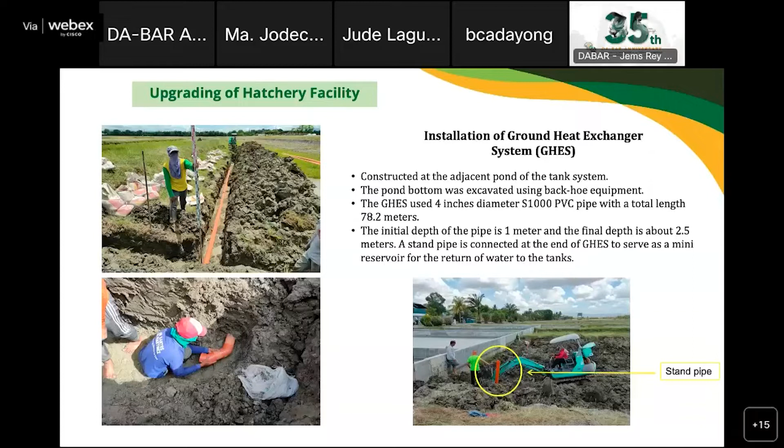Right after the installation of the heat exchanger system ay ang installation of the filtration system. Generally, ang ating filtration system ay may tatlong components. We have the first stage where the solids will be removed. Then next, the second stage where the water will pass through the filter media beds, microfiltration, where the biological filtration system will do the work. And then lastly, we have the third stage of the filtration or the clarifiers. This is with the aid of activated carbon and fiber wool to further filter the pond water.

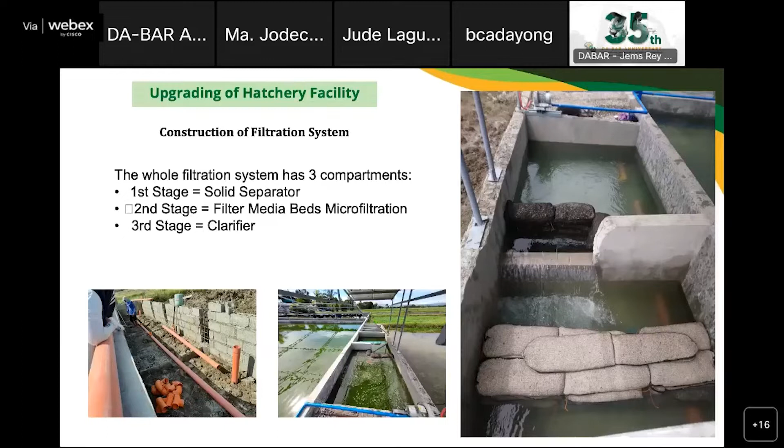So, na-discuss na po natin ang tank system, ang ground heat exchanger system, at yung filtration system. Now, dadako naman po tayo sa fabrication and installation of the aeration system, particularly the air lift system. So, ito pong air lift pumps are commonly used in aquaculture systems basically to circulate water at mag-provide ng dissolved oxygen. At the same time, ang main component po ng air lift system is a PVC pipe and an air blower. So this kind of aeration system also aids the water circulation within the pond system.

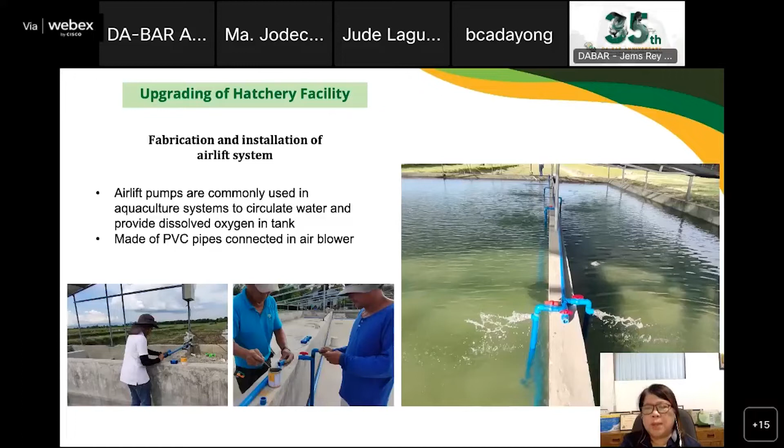Isa sa mga components ng ating automated hatchery system na aking nabanggit kanina ay ang hybrid solar water pump. So, ito po ang picture ng ating hybrid solar submersible pump, para po ma-avoid ang fluctuation of power supply. Therefore, the system will automatically tap from the AC power supply for continuous work. So this pump system will aid the circulation of pond water through the filtration setup to the ground heat exchanger system, then pump back water from the ground heat exchanger system to the tanks.